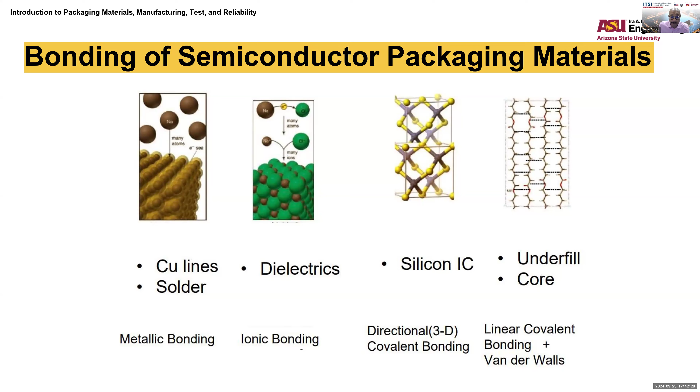So now, if we continue on, we have to think about it. We talked about how we went from lead frames and these dual in-line packages all the way up to the 3D packages. Now, as the packages evolve, materials are going to have to evolve because we're going to change form factors, and that's going to lead to higher stress. We have to mitigate the stress as much as possible.

And then we have to talk about use conditions. We look at that dual in-line, it probably wouldn't do well under the hood. But now we have to have packages such that they can serve in various environments, one of them being under the hood. So we have to be able to design packages and materials for such. And then when we get to assembly, there's going to be some issues about like the interposer. If we're going to use silicon as the interposer, it's going to take some effort to etch those through holes and then plate and fill them.

Previously, we talked about power and thermal management. As we go to smaller and smaller footprints, form factors, the power density is going to increase because we're going to definitely increase the density of our transistors. And if you recall from the example we had, for just one clock cycle, and we only have 20% of the 1 billion transistors toggling, we would generate 600 watts. So that's a lot. And if we're doing that over and over again, we've got to be able to get that power out. Okay, so it's going to require new materials that can be used as TIMs or the heat spreaders.

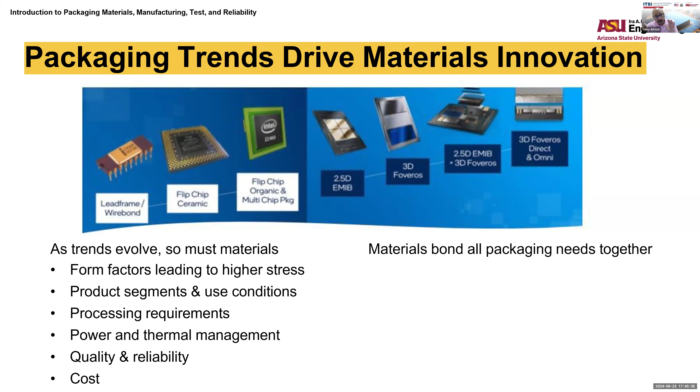Now, we see that we have the schematic of a package. We go from the heat spreader.

So bring it over here. We go from our heat spreader to our TIMs to the die, where the transistors will reside on the surface. Okay. Then we have our first level interconnect, which are the C4 solder balls. Then we have a printed circuit board, composite material of polymer, epoxy, and metal. We have our die side components, as well as our land side components.

Now, all of these are different materials, whether we're looking at copper metal for our integrated heat spreader, graphite for our TIM, silicon for our die, silver, tin, silver, copper solder balls, okay? So we have a variety of materials that we need for our package. And they have to be there to help us meet this need for innovation.

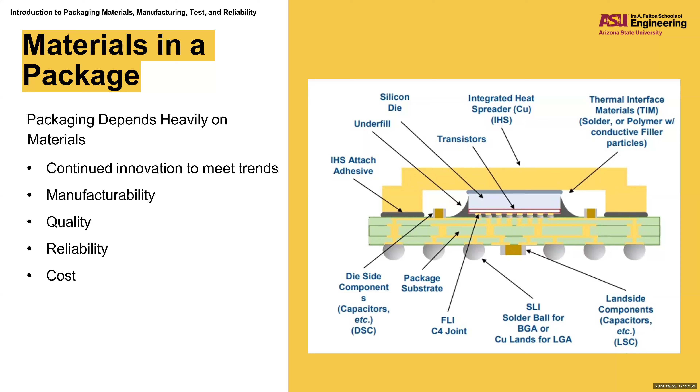As I said, we're going from 2D to 2.5D to 3D heterogeneous integration to embedded heterogeneous integration. We've got to be able to manufacture. Again, we have to have quality and reliability at every level. Okay? So that means we have to have proper material selection. And that means our portfolio will have to be diverse as such. That means we're going to use metals for interconnects, solders, heat sinks, TIMs, and fillers.

So like in the case of this underfill, I've got the underfill, which is a polymer. I can actually add some metal powder to help improve its thermal conductivity. Okay. We're going to have ceramics if we have a ceramic substrate, or we would definitely have ceramics as dielectric materials in our capacitors.

Polymers will be utilized for substrate. Like here's a printed circuit board. We have our TIMs, encapsulant. We'll see those later on, as well as adhesives. Okay. Now, in each case, the reason we select these things is because we are interested in performance in a variety of things. The two most important ones: electrical performance, in the case of dielectrics, metals, ceramics, whether we're making inductors, die-side capacitors, land-side capacitors, they're needed for the voltage regulators.

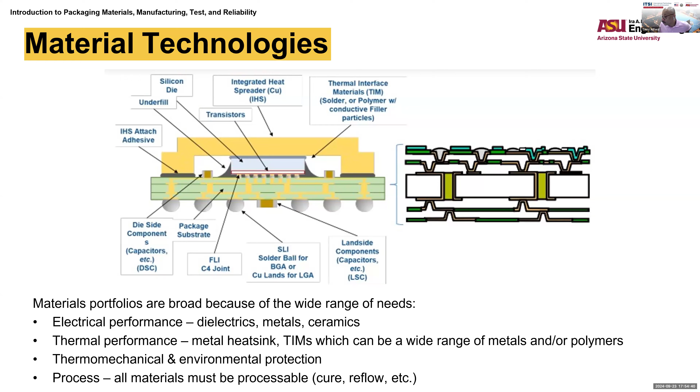Now, if you came in and said, we're going to put some ceramic material and use it as the underfill, it won't happen because you'd have to go to such incredibly high temperatures just to get it to flow under. So it won't work. Okay? So we have to know a lot about different types of materials so that we know when to use them, based on whatever performance we want: electrical, mechanical, thermomechanical, as well as environmental protection.

Now, here's an interesting question. We have to find solutions to our challenges, and we're going to have challenges regardless. Green manufacturing. When you try to open up a semiconductor manufacturing facility, the first permit you have to do is get water.

And you have to show that you're able to reuse your water over and over and over again, such that you're not always garnering water from the community. So you got to be able to use your water over and over again. And you have to use processes that are clean, such that they don't produce a lot of hazardous waste. Okay?

Then you really need sustainable processes. These are processes that we know they can go, they don't use anything that's limited. Okay, like silicon. Silicon comes from sand. Got plenty of sand. There's no shortage of sand. It's got to be the right type of sand. Okay. However, let's go to the other extreme. Get out your fancy cell phone.

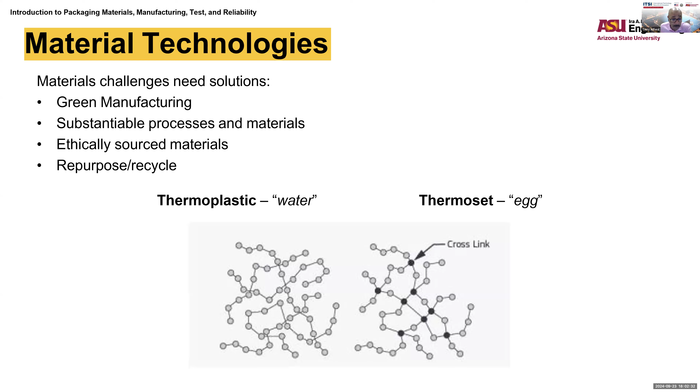Okay, so moving forward, we got to really think about this recycling and repurposing. So we talk about which one is best for recycling. It's the thermoplastics. Okay.

Now, see if we were actually listening last week. We have another moment for inquiry. Which feature is typically not a landside feature? Underfill, capacitor, first level metallization, all of these, none of these. We'll take our second poll.

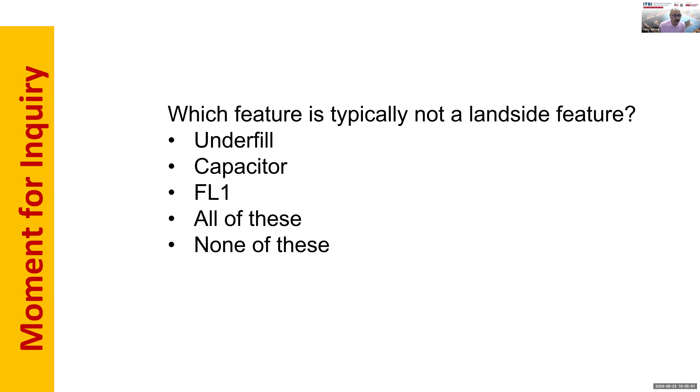Okay, first level metallization, or first level interconnect, is not land side. That's going to be die side of the printed circuit board. And if we have to go back and take a quick look, we didn't do as well as we should have done on that one. Okay. All right. So let's go.

So in summary, our package will have a variety of materials. They will range from composites, which utilize two materials to obtain a desired property. We'll have metals, metal lines, metal traces, solder balls, integrated heat spreaders.

Again, taking advantage of metals in their metallic bonding. Ceramics, we can use those for dielectrics, and we will definitely use those for insulators. Polymers will have a variety of properties and uses, ranging from encapsulants to printed circuit boards.

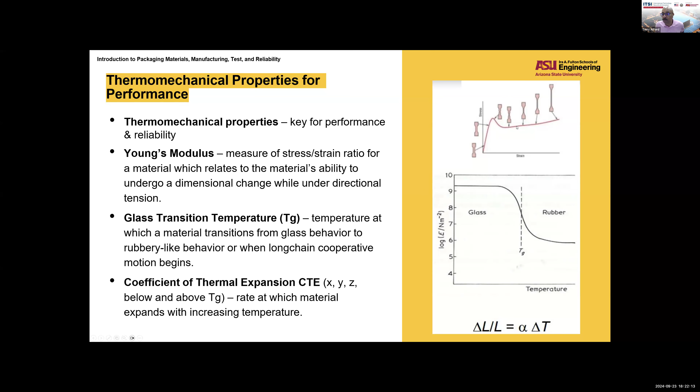Whereas if I'm just below the glass transition temperature, still sort of rubbery but stiff, I will have the typical stress strain curve for a crystalline solid. I'll go through yield stress, then some elongation till finally I get a fracture. So at failure, I have a ductile fracture because I'll go through the linear portion, then I'm undergoing plastic deformation until I have fracture.

So now we have to really consider coefficient thermal expansion mismatch. When we have adjacent materials intimately touching, and we have changes in temperature - remember we're talking about thermomechanical properties, these are properties that are sensitive to temperature changes - if I have differences in coefficient thermal expansion, I can introduce compressive or tensile stress during testing, during service, during transportation.

Because do not forget, we live in Arizona, or the folks in Costa Rica - it's warm, unless you're up on San Jose, up on the mountains - most other places are going to be warm. So during just transportation and storage of packages, before they're put in service, before they're put in the laptop, they have to be able to handle just the ambient temperature changes, as well as deal with the temperature changes when they're in service.

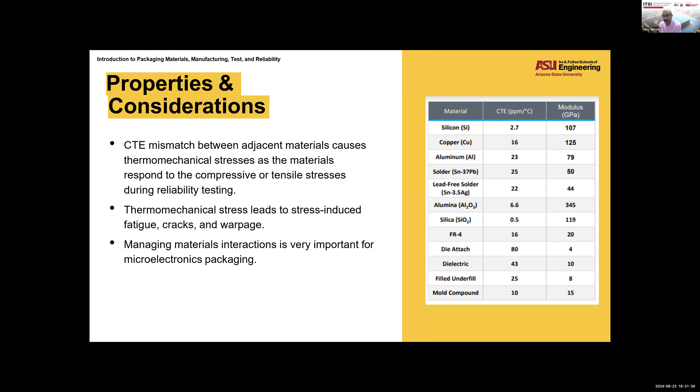Here, now if I look at my TIM, that's my thermal interface material that couples two interfaces for the heat sink. Thermal conductivity is the rate at which heat is removed from the medium. We want to make sure we get these units right: watts per meter Kelvin, big K Kelvin.

Now, Q is going to be the amount of heat. A is the surface area. Delta T is the temperature difference in Kelvin. And D is the distance traveled. You remember we went over this, it should be a review from our lectures on heat transfer.

So for the TIMs, heat spreaders, and heat sinks, we want those to be very good thermal conductors. Heat sinks are usually aluminum because we want those fins to be soft and easier to machine than, say, copper. We'll use aluminum for the fins, but copper is typically used for the integrated heat spreader.

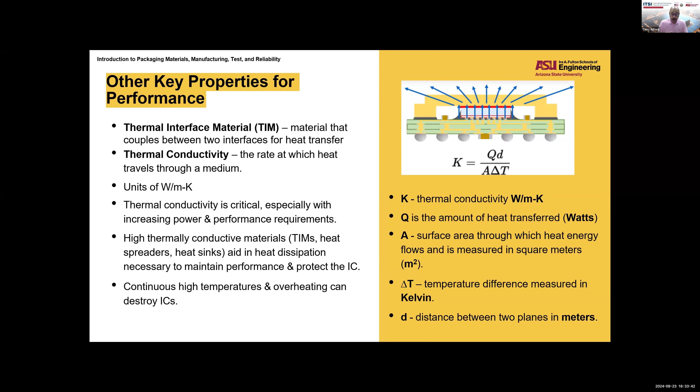Now, when we design, we have to have the correct material selection. We need high conductive thermal interface for high power parts and heat dissipation. If you generate a lot of high power, you've got to get that heat out of there quickly.

Then we go to tin, silver, copper solder. We do that because it replaces tin, lead solder. A lot of municipalities now will not allow any lead manufacturing in their cities, and rightly so, since we're talking about green manufacturing.

But now we run into problems with tin, silver, copper solder, because remember, tin-lead has a very low eutectic or melting temperature for the alloy. The melting temperature for tin, silver, copper is about 34 degrees higher. That requires more energy, more cost. So as I said earlier, you always want to try to keep the manufacturing temperature as low as possible.

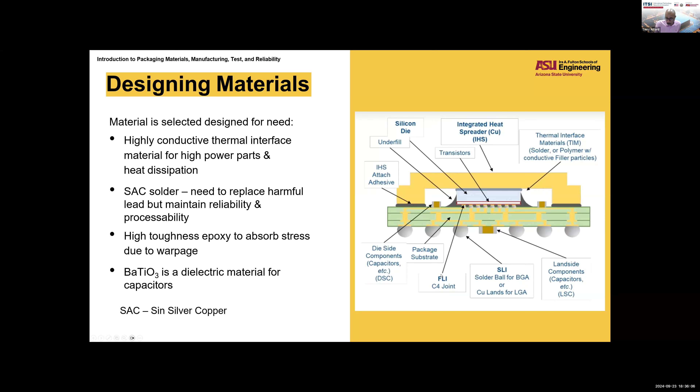And then we can have land side capacitors and die side capacitors. Land side is usually closer to the die, so you can make a direct impact, whereas die side is sometimes further away. But again, it can be based on the design as well.

Now, the other thing we have to worry about, like in this particular case where I have my can on top, is profile. Will I have a really thick die? Will I have a thin die? What happens if I have multiple dies of different thickness? In this configuration, I have one die, and hence only one die height to be concerned with.

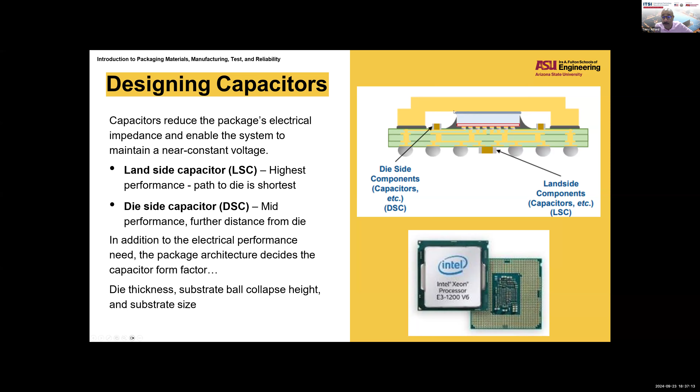We want high capacitance, as we saw earlier when talking about voltage controllers and power supply, so that the net impedance will be lower. Remember, we also have to place them in shunt geometry - this is true when capacitance is high, the impedance is low, by putting them in a shunt design architecture.

Again, we use barium titanate for its high dielectric constant, with nickel-tin electrodes. Nickel gives you good electrical contact, tin gives good bonding. Depending on the number of layers, that's how much capacitance you're going to store. They're relatively inexpensive, but they do have size, so you have to think about where you're going to place them on the package.

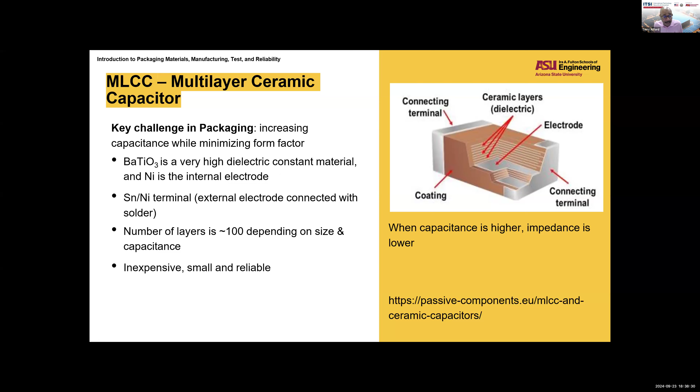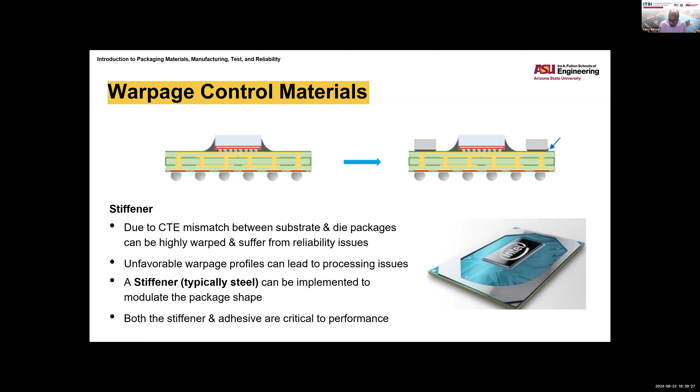And the nice thing about that, by putting the stiffener on, it helps with the adhesive as well. Because if you're using an adhesive and you get warpage, sometimes the adhesive just can't hold it. But if you put the stiffener on, it can actually help secure the package.

I think we have enough time for this; if not, I'll just show you how to do it. For a copper TIM, where the TIM has a coefficient of expansion of 8 parts per million per degree C on silicon, approximate the maximum thermal stress in megapascals for an 82 degree C change from room temperature. Assume a Poisson's ratio of 0.25 for all materials.

So here, when one of these is a film, you have your difference in coefficient of thermal expansion, your temperature variation, and the modulus of elasticity of the film divided by 1 minus Poisson's ratio. So Poisson's ratio is 0.25.

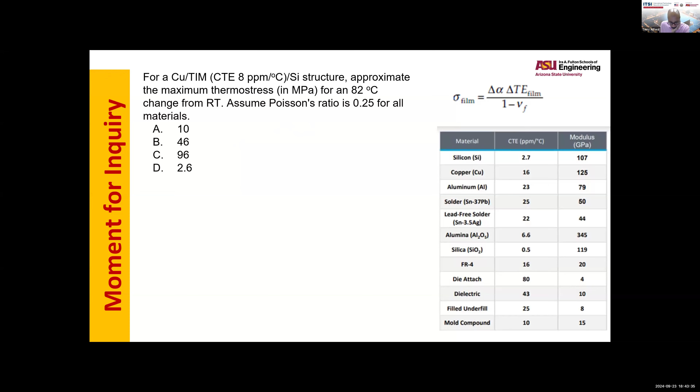If I look at the other interface, I got silicon as the film, difference in coefficient of thermal expansion, plug in my numbers. The stress at this interface is much higher, almost 10 times higher than the stress back here. So the difference in coefficient of thermal expansion will manifest itself in thermomechanical stress. And those stress levels can be high or relatively low. On one side, 3 megapascals, 24 megapascals. All right, so you should think about trying to do some calculations for yourself and look at the thermomechanical properties.

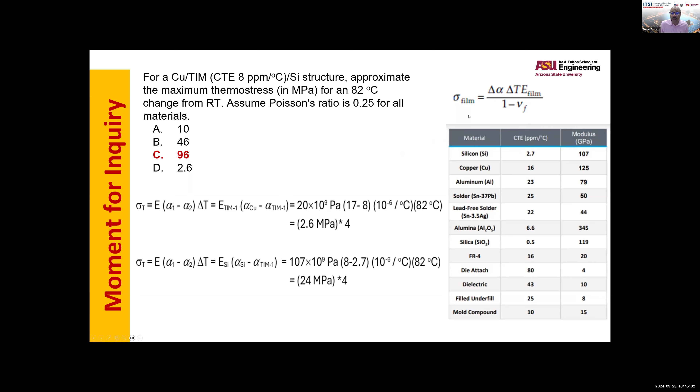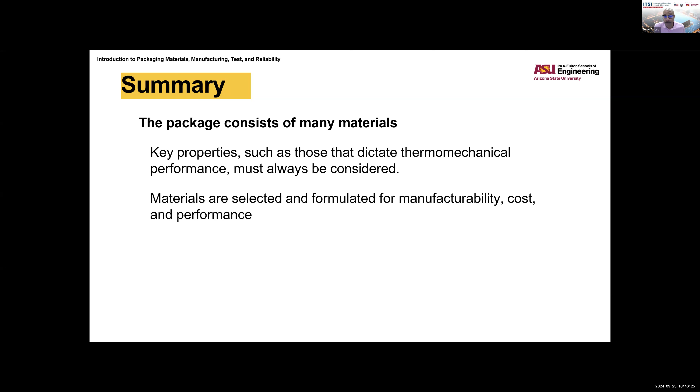So again, we talk about different materials. Those different materials are going to dictate the thermomechanical properties, and you always have to be concerned because if you don't design it right, or you have bad service conditions, you can expand and actually have stress where you're touching the can, which is not good. Distortion in sizes, your part's not going to run efficiently, okay? And then if you get runaway, you can destroy it. So bottom line, for reliability, manufacturability, cost, performance, you have to select the proper material for your use. Okay. Any questions?

All right. Okay. I have to go through here a little quickly. Okay. So part 2. So we talked a little bit about polymers, and we mentioned earlier, we can have polymers that we can use for encapsulation, as well as for a printed circuit board. And we can use our polymer TIMs and underfill such that they can help to mitigate some of the stress associated with bonding.

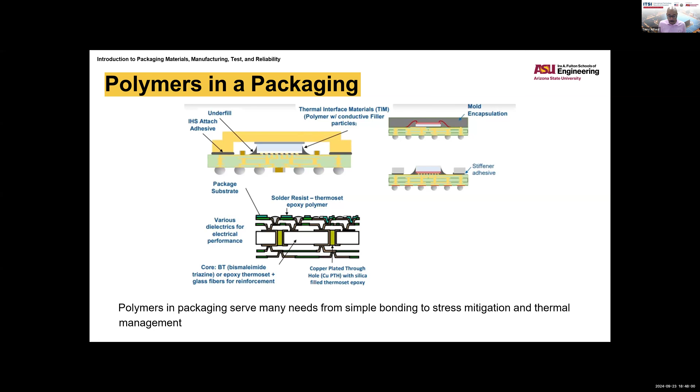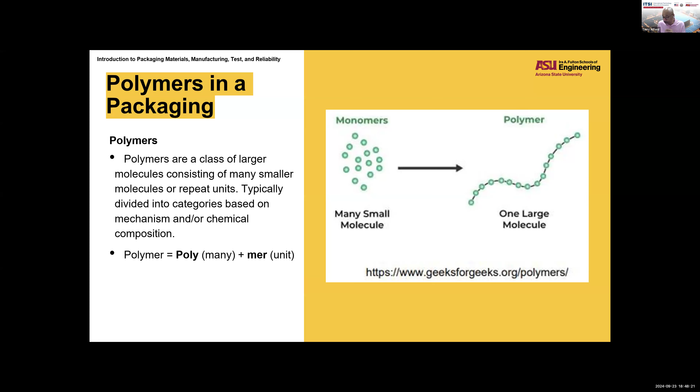Now, if we talk about polymers, again, poly, meaning many, mer, unit. We have a lot of little molecules and we tie them together to give us one large molecule. Amazingly, if we look at a bowling ball, that's one big polymer molecule. And we talk about the degree of polymerization, that's the number of these repeat units that we have. And why are they interesting? Because they will influence tacticity. When I have these bonds hanging off the side, it'll make it difficult for the polymer chains to slide across each other. So it'll make it stronger.

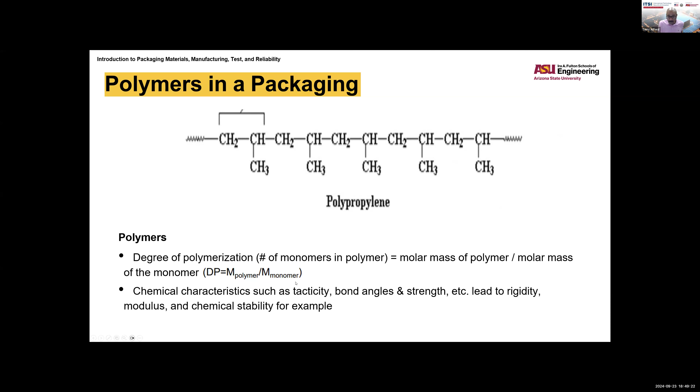Compared to a polymer that does not have any side chains, it'll be more flexible. And the bond angles and strength will also dictate mechanical properties like modulus of elasticity, as well as the chemical stability. And then you ask, why do we use polymers? Well, polymers, in this case epoxies and silicones, are low cost, low weight. And sometimes we use them for dampening. You can tune them with fillers, and some of them have good chemical resistance, because many acids are delivered in polymer containers.

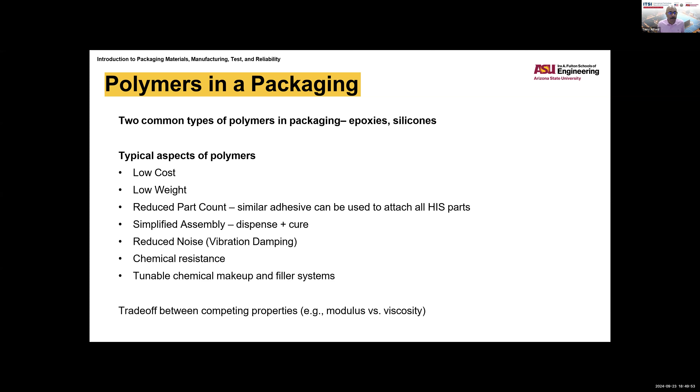So when we talk about polymers, we want to think about the modulus of elasticity, the glass transition temperature, melting point if it's a thermoplastic. Concerned about swelling, that's where they absorb moisture from the air. Some polymers are very effective at it. And generally you don't want that because it will result in changes in the dimensions.

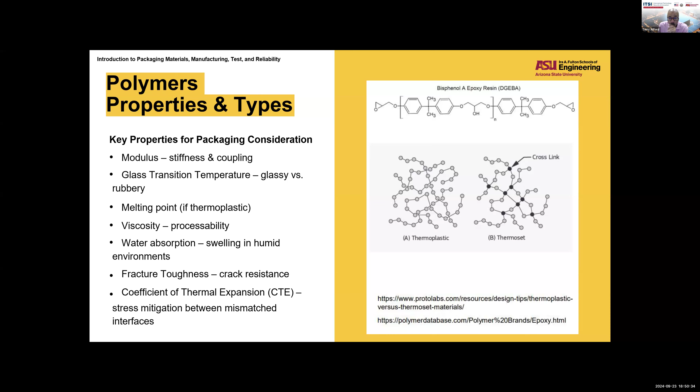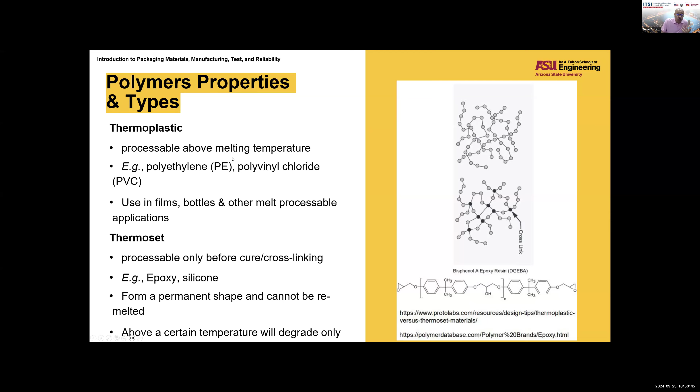And then we talked about thermoplastics as well as thermosets, right? In one you can recycle, one you cannot. Now, again, the advantages of polymers: good chemical, mechanical properties, easy to mold, process, low weight, low cost. Now, drawbacks: they are low temperature, right? They are sensitive to temperature as well as humidity. And viscoelastic properties, meaning the mechanical properties can change with time. So you have to be mindful of such. And they are much softer and have lower strength than the metals and ceramics.

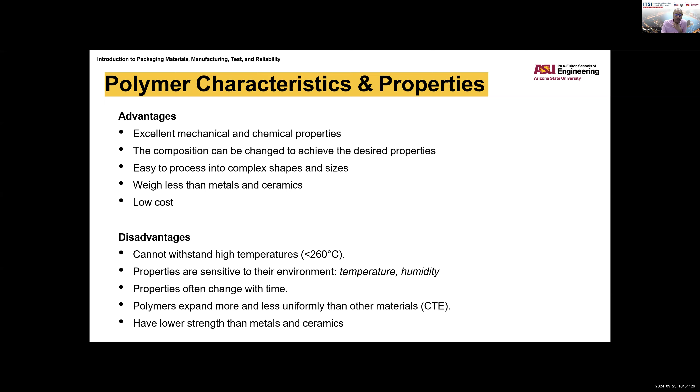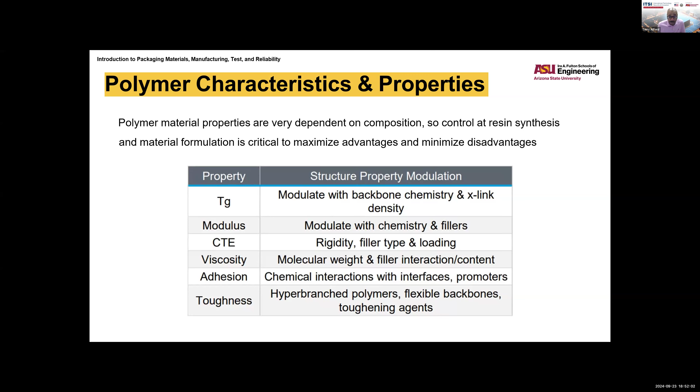Okay. So in this particular case, again, we didn't talk about toughness. Toughness is how much energy you can absorb at fracture. So an aluminum bat, it'll bend, it'll absorb, difficult to make it break. Whereas the wooden bat is more brittle, so it will crack. So toughness, the amount of energy you absorb at fracture. So these are important things.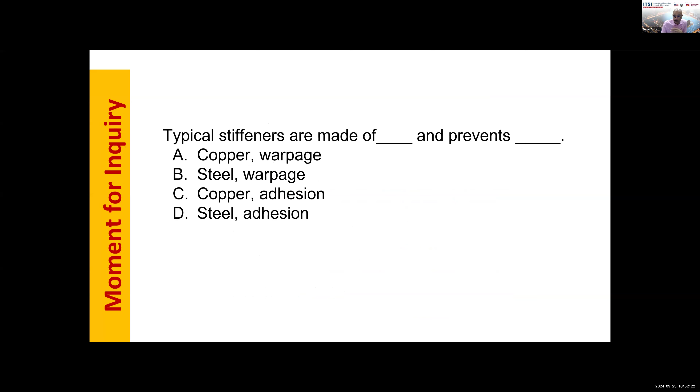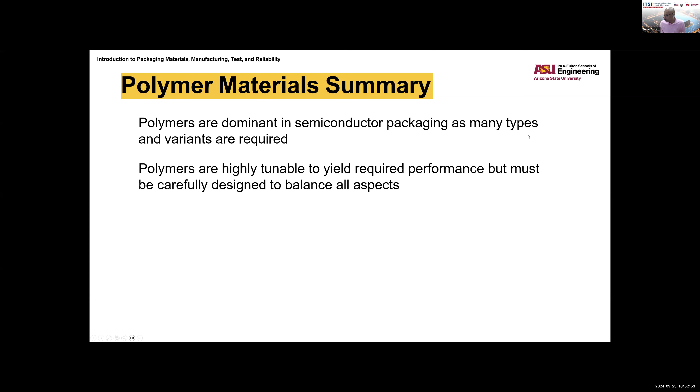Okay. So again, polymers are dominant in the semiconductor packaging arena. They have a lot of unique properties, good properties. We can form them. We can add fillers to change their mechanical strength, thermal conductivity. Just really good material where you can design it or tune it for a specific application. All right. Okay, so any questions?

I'm gonna cut through this one. Okay. Professor Alford, I do see one in the chat asking what was the right answer to the last inquiry. And I don't know if it was sent before you said the answer or after we closed it out. Do you want me to reshare that poll result? Let me hold on. It was thermal mechanical stress can lead to.

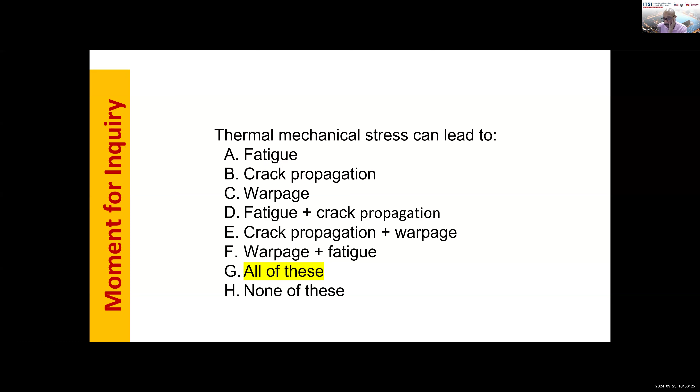Professor, why has silicone been selected as a common polymer for semiconductor packaging? Could you repeat that, please? A little louder. Why has silicone been selected as a common polymer in semiconductor packaging? You said silicone? Yes. Oh, silicone is actually lightweight and has good thermal conductivity for a polymer.

And one of the things, it has good chemical resistance. Silicone is not hygroscopic, so it doesn't absorb the moisture. And certain silicones can take the elevated temperature. Because generally, we want to try to keep as much of the processing below 260 degrees C. Really want to try to keep it below 205. But the nice thing about silicone, it can take the high temperature, not hygroscopic, inexpensive, good thermal conductivity. And it's been around for a long time.

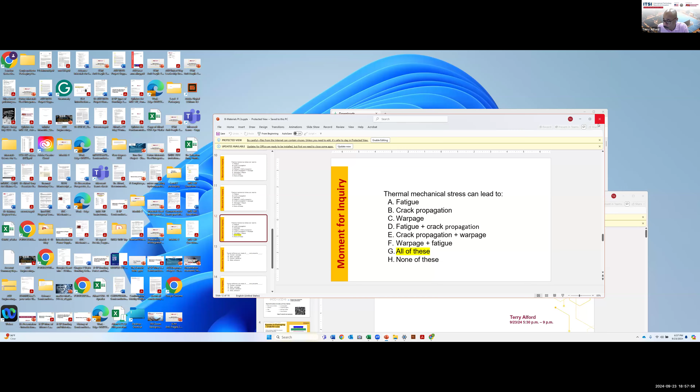Any other question? Thank you. You're welcome. Okay. Okay. Great lead in.

Yeah. Now, when we start talking about epoxies, we'll use them for our substrates, plated through holes, meaning holding the printed circuit board and traces together, substrate buildup, again, part of the substrate, printed circuit board, underfill, die attachment, mold compound, everything. Again, excellent chemical and corrosion resistance, good mechanical properties, high modulus, good moduli, high glass transition temperature, good adhesion, low shrinkage.

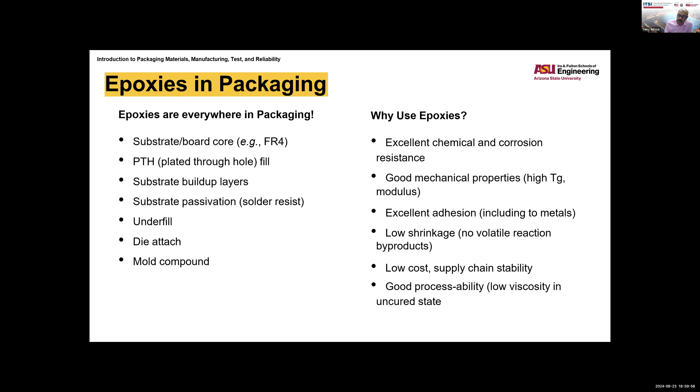So again, when we start absorbing things, okay. Also, no volatile reaction byproduct. When you cure it, you don't get a lot of solvents escaping. Then good process, you can process it. It's got low viscosity. So before we cure, we can pump it in under the die into C4 solder balls. And then when we cure, it'll get good flow.

Okay. And then we actually can have different ones. We can have resins, again, hardeners, fillers, catalysts to help speed up reactions. We can have coupling agents to help us make the two polymers stick together. Toughening agents to make them stronger, such that they absorb more energy before they fracture. Okay, we can change their shape. FR4 is flame retardant. So again, a lot of different properties that can be tuned or dialed in.

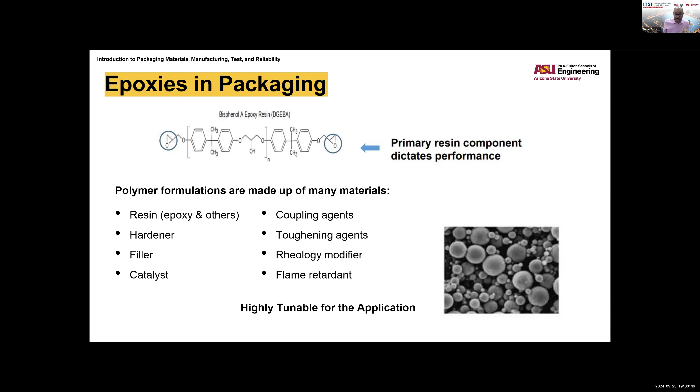Okay? And why do you want to do it? Let's look at the case of underfill. Well, when we apply underfill, it's gonna heat up during the curing, so it's gonna be hot. It's gonna expand, and then we gotta cool back down. So when the package cools down, the underfill is gonna help to absorb the strain and deformation. Now, the solder joints will be compressed, but they will be protected by the underfill, again, to provide mechanical stability.

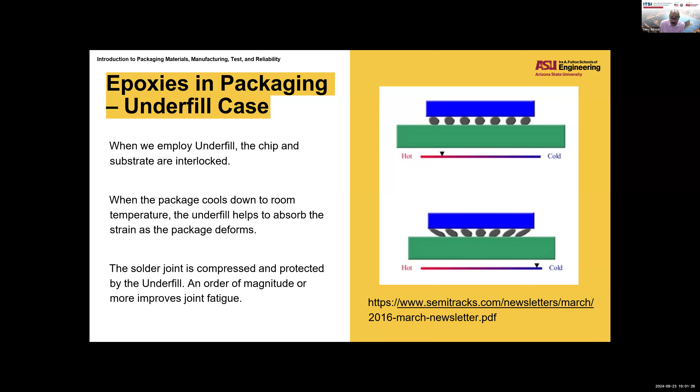Why is it important? Well, if we have a crack, and if I get this underfill right, it can actually come in and fill in some of the cracks. So there is like an adhesion layer, but also if it comes in there, it'll help blunt the crack. So it'll reduce the probability of crack propagation. And then we know that if we dial it in right, we can actually reduce that solder fatigue because it'll absorb some of that stress and limit the strain. But again, we have to dial it in.

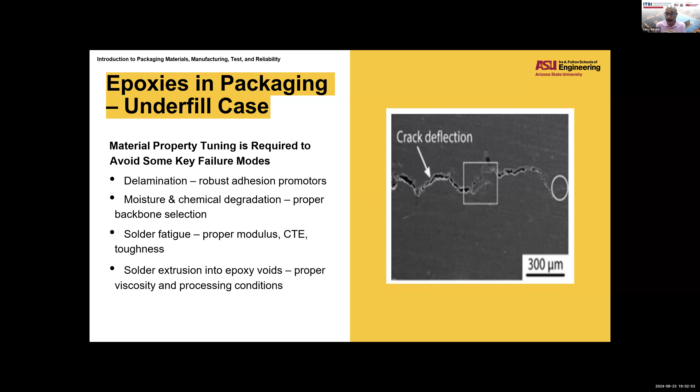That means we have to know the proper moduli, and we have to understand the coefficient of thermal expansion and what is its effect on toughness. You improve toughness by preventing crack propagation. So if we have these cracks and we fill in with our epoxy, it'll help blunt the tip of the crack, reduce crack propagation, and improve the reliability.

Okay. Now, silicone, as I said, has been around for a long time, and sometimes people can have silicone-based grease or phase change material. The nice thing about a grease or phase change material is it actually will comply to that surface. Meaning, if the surface is not so smooth, it'll fill in. If I have a crack, it'll fill in. So that's the great thing about using grease or gels.

Sometimes we will use the silicone as an attachment. If I want a good hermetic seal, or I don't want moisture going in there, I can utilize that silicone as a sealant. And then silicone is great because we say it's a toughener. Basically, it's going to get in there, if I do it right, add some mechanical stability and protect, in this particular case, C4 solder balls, and absorb some of that stress when we go from heating up to cure it, to cooling back down to room temperature.

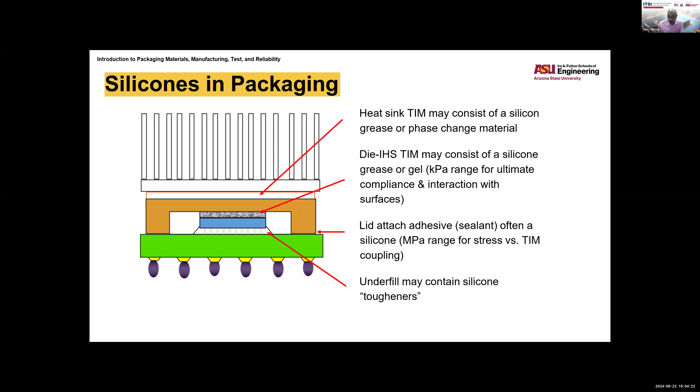So again, cross-linked polymers, very soft. We can dial in the moduli, from some kilopascals all the way to 500 megapascals. Very tunable. Very low water solubility, so it's hydrophobic, so it won't absorb the moisture. They don't want the water. That means they'll keep their dimension, because if you swell, you lose all control on dimensions. And as we saw earlier, you can use them as an adhesive and a hermetic sealant.

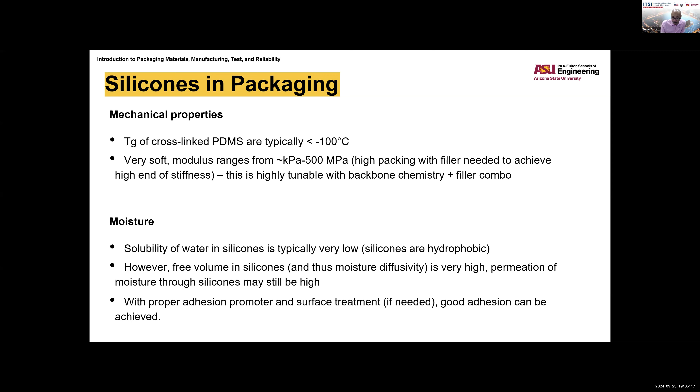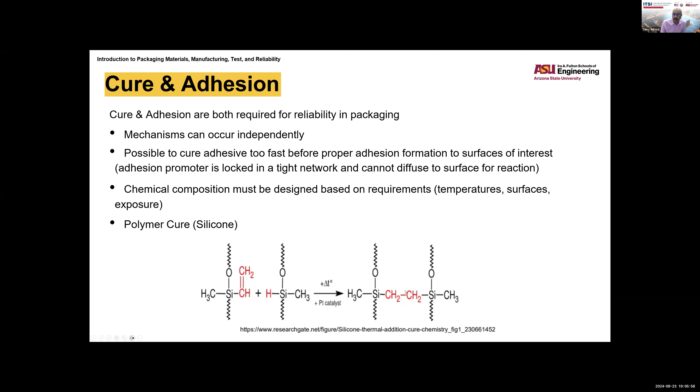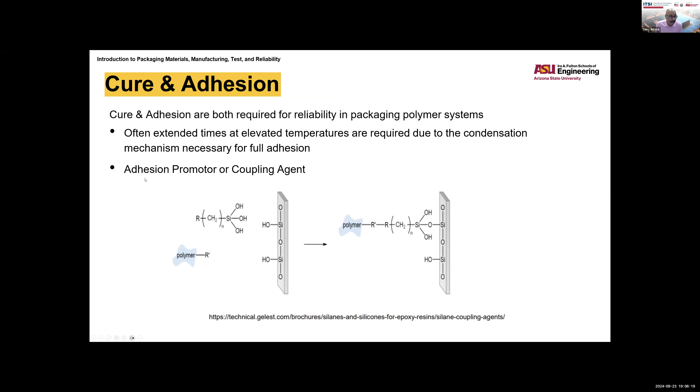Talk about curing. When we heat it up, it's going to cure, or undergo a change in the structure. In this particular case, we're going to increase the temperature. We're going to have platinum as the catalyst to help promote this reaction. And so with that, we've developed an adhesive that now has a good, strong carbon-carbon bond. And then a lot of times we will have an adhesion promoter. That's just another polymer that will help us make a bond to the surface or to another polymer. Sometimes that adhesion promoter is referred to as a coupling agent.

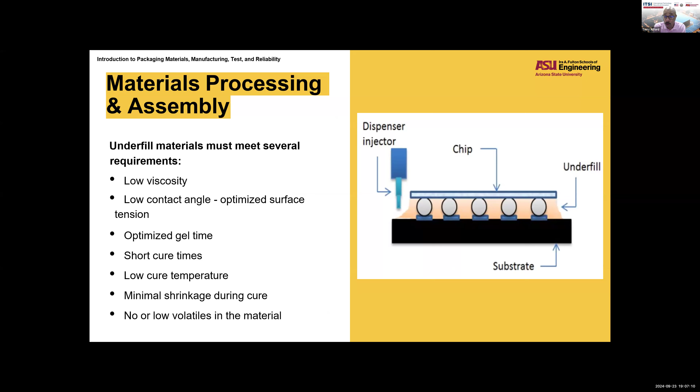Then underfill, again, we want low viscosity. Once we inject the underfill, we want to be able to heat it up for short times at low temperatures. Remember, we always want to operate at as low temperature as possible, shortest time, because time is money, and the higher the temperature, the more energy, the more costly the process. And finally, we want minimal shrinkage during cure, as well as no or very low volatiles, because if you have a lot of volatiles coming off as gas, you can end up with a very porous underfill. If you have a very porous underfill, you're going to have low mechanical strength.

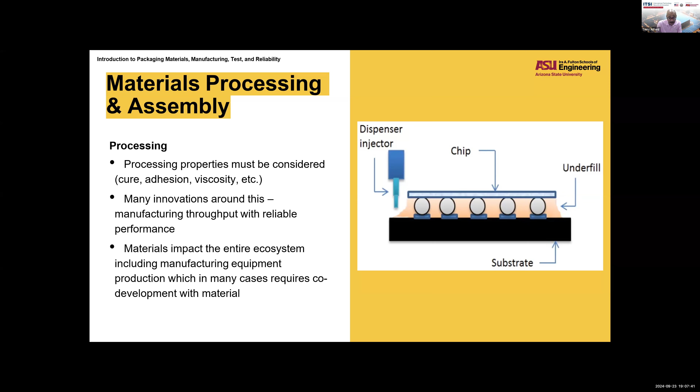So that means we have to understand the different types of adhesives and the processing of those adhesives, and understand the materials' properties during the cure. So there's a lot of innovation that's needed. Materials are everywhere. So with that being said, because of time, we won't do this one, but I'll just give it to you.

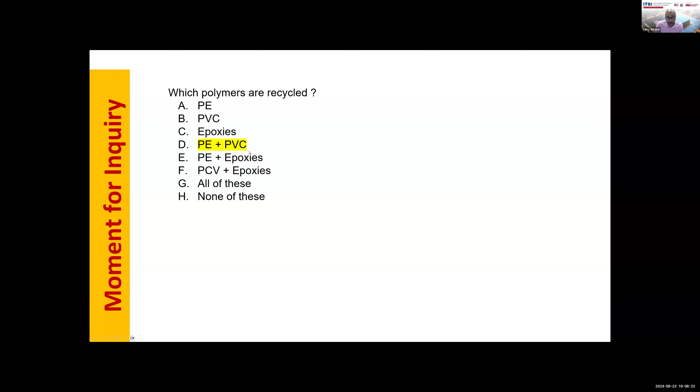So with that being said, we know that the properties of our polymers can be tuned, designed in such a manner by modifying the chemistry, adding additives, whether those are fillers to improve mechanical strength or fillers to improve thermal conductivity. And then whenever we are talking about designing parts and trying to accommodate thermomechanical performance, there are going to be trade-offs sometimes between coefficient of thermal expansion, viscosity, coefficient of thermal expansion, and the modulus of elasticity.

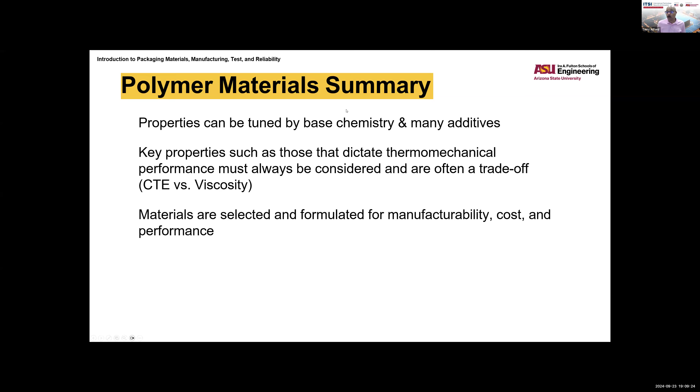But again, bottom line, we have to have our material selection such that the material achieves the function for which it was designed. We want it to be manufacturable and cost effective. So with that, I'll stop. And do we have any questions?

Okay. All right, so we've been going at it. So let's take a, well, people have been coming in and out. Let's take a 5-minute break and come back, and then we will work on our research paper. Okay. So let's say 7 minutes. So be back here at 7:17.

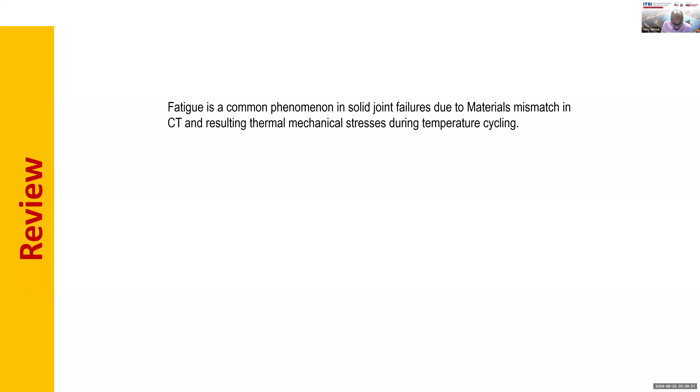Okay, solder joints are subject to fatigue loading during thermal cycling. So that was essentially the same question. Let's skip that one and go. Oh, here's a good question. Creep is a time-independent elastic strain phenomenon in materials under sustained load at elevated temperatures. True or false?

And can we have our poll, please? Oh, sorry, it says on my end that it was launched. Oh, maybe I don't see it. Let me go back and try that again. Do you see it? No. Sorry, everyone. I'm working on getting a new one up. It just keeps saying it's been launched, so I think it wants me to make a new one. I'm sorry about that. 1 second. Oops. We'll take 10 more seconds.

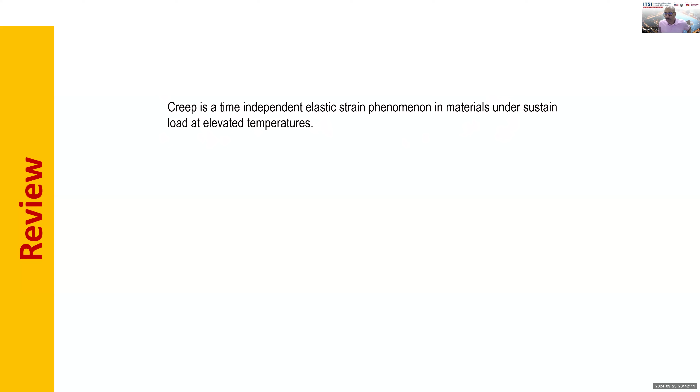This statement is false. Creep is a time-dependent strain phenomenon in materials under sustained load at elevated temperatures. Yes, it is time-dependent. It's a function of time. Okay.

And then it's our last one for the evening. Oops. Creep occurs at temperatures less than 1/2 times the melting temperature of the material. In this particular case, we're talking about metals. True or false?

Sorry, everyone. I keep getting the same issue where I create it and then it doesn't let me launch it. So let me try one more time. Okay, we'll try one more time. If not, we won't bother you anymore this evening. Okay. Well, sorry, I'm getting no button to launch. Okay, no problem.